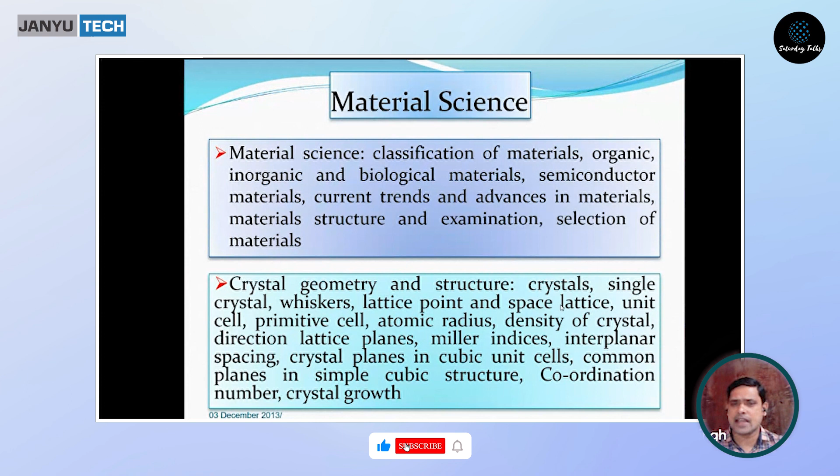In this, it is very important to know the crystal geometry and structure - crystals, single crystals, whiskers, lattice points. These are very basic physics concepts. I will not go into detail of that, but try to focus on understanding the material in a general way rather than from the physics point of view.

Material science people also know it as materials engineering. It is an interdisciplinary field applying the properties of matter to various areas of science and engineering. For example, if somebody says I want to work in making rockets, rocket making involves multiple aspects - like what type of material will be used for painting the rocket surface, what kind of material the rocket body will be made of, which should be light, and how it is made. This is basically the aerodynamics and engineering part. So material science actually covers both science and engineering.

This relatively new scientific field investigates the relationship between the structure of materials at atomic or molecular scales, and how this is responsible for macroscopic properties - like which paint we use on the surface, which will define how much weight it adds and whether it can pass through Earth's atmosphere without burning. All these are called macro. Macro means big - we'll talk about how big later. We can understand macro as something we can see with our naked eyes, like my fingers or my hair, but cannot see things of micro size, like bacteria. Micro sizes are about 100 times smaller than the diameter of hair - 100 micron is the diameter of our hair.

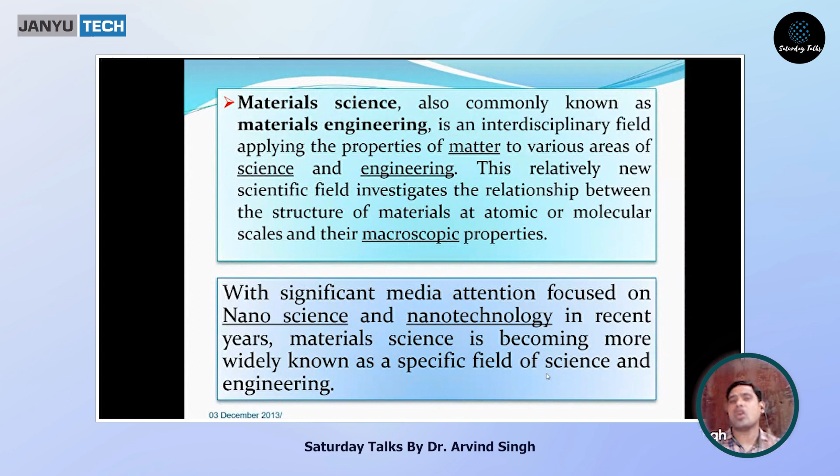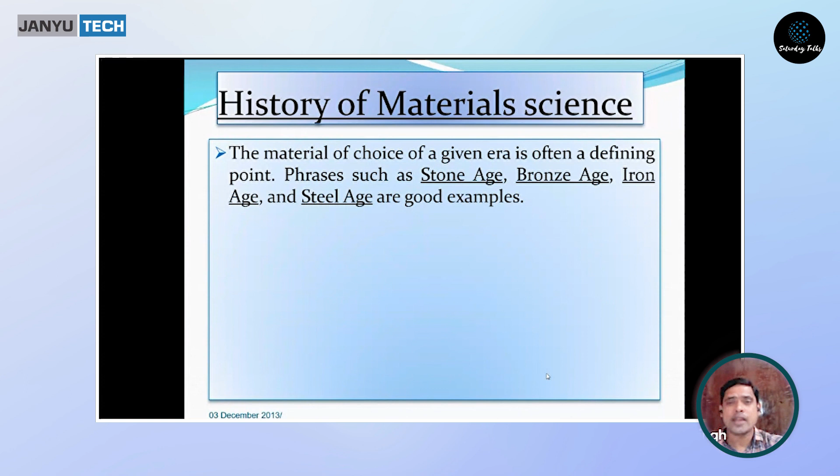So let us see what was the history of material science. I'm not going to show diagrams of olden or historic period materials, just a few points. The material of choice of a given era is often a defining point—you can understand how important materials are. Even the age of human civilization is defined by the type of materials they were using. So it was the Stone Age, Bronze Age, Iron Age, Steel Age, and these are some good examples to know how important material science is.

A major breakthrough in the understanding of materials occurred in the late 19th century when the American scientist Josiah Willard Gibbs, known for thermodynamic study in physics and chemistry, demonstrated that thermodynamic properties related to atomic structure in various phases are related to the physical properties of the material. This was a remarkable discovery, a breakthrough in understanding how this happens.

To help you understand, suppose we have chapatis made at home. If you want to check any material, we use X-ray, other techniques, scanning microscopes and so on. But if your mother is making a chapati at home, we don't take an instrument and peep inside to see whether it is made or not. How the surface looks now decides how much heat has passed into the inside of the chapati. So this is basically thermodynamic properties related—how the material is forming—and that is actually related to the atomic structure of the material.

You will have good, very flexible chapatis with maida. You will not have good flexible chapatis, or rotis, with jowar or bajra grains—they are different in terms of their atomic structure, in terms of their makeup. The same way materials also vary. You can see the powders of jowar, bajra, or wheat or corn—they look almost similar, not very different. But when the chapatis are made, they look so different.

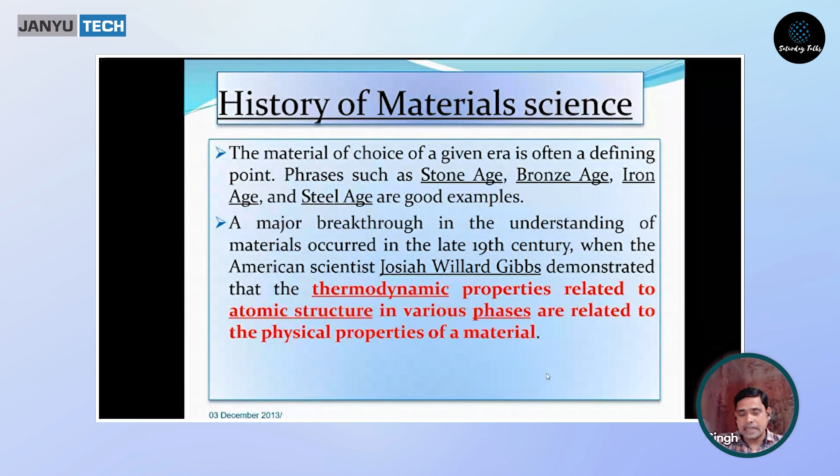So this is actually what thermodynamic properties means—how the materials are going to behave, their thermodynamics, how the molecules and atoms move and behave with each other. That is related to the structure property, which in turn is related to their various phases, and then to their final physical properties as well as their other chemical properties.

So the basis of material science involve relating the desired properties and relative performance of the material in a certain application to the structure of the atoms and phases in that material through characterization. So whatever material we are taking, we characterize it. The major determinants of the structure of a material, and thus of its properties, are its constituent chemical elements and the way in which it has been processed into its final form.

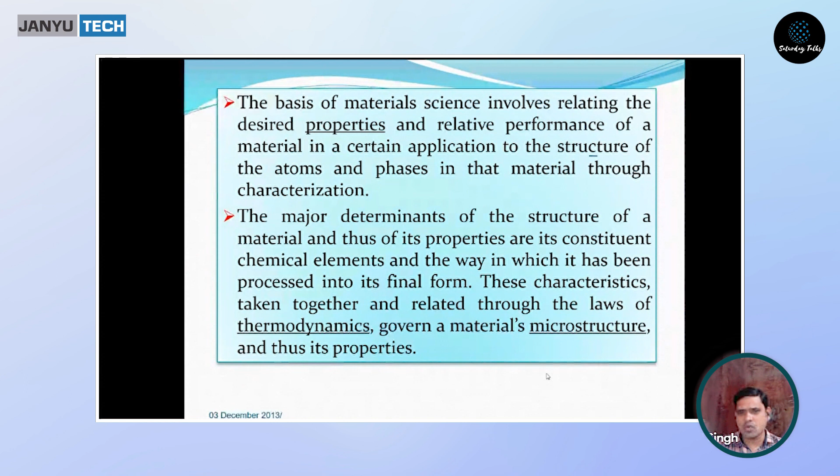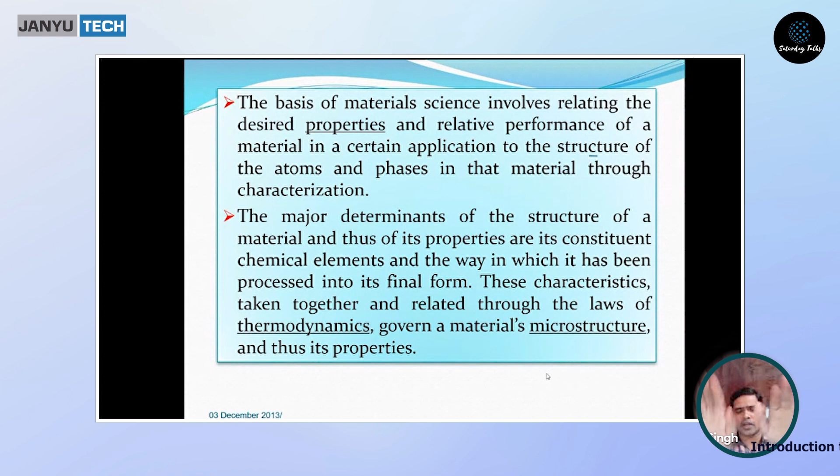So if you recall, I've already talked about this—I took the example of making chapatis with bajra. For bajra, you don't need to knead the dough so much; you can just mix it with a little water and put it on the frying pan or something like that. So there are different processing techniques.

Let us see again the historical perspective from a different angle. Materials are probably more deep-seated in our culture than most of us realize. What are materials? Materials are the substance of which something is composed or made. Every segment of our everyday life is influenced, to one degree or another, by materials.

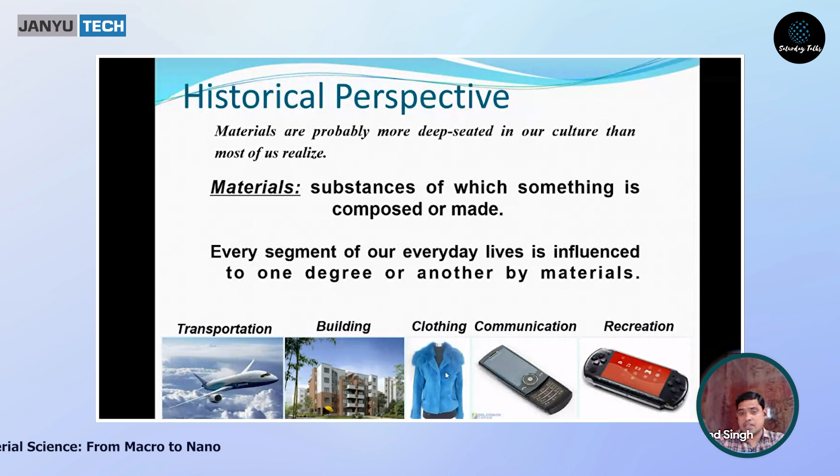Just take the example of mobiles—earlier they were small and heavy, now they are becoming thinner and lightweight. Transportation is very important too; we have aeroplanes, but also other modes of travel. Buildings can now be tall and built in a month or two. Clothing—when it's cold we use warm stuff; earlier it was thick blankets or jackets, but now there are thin inner layers, as advertisements call them nowadays. Communication and recreation—all these are materials from a material science perspective.

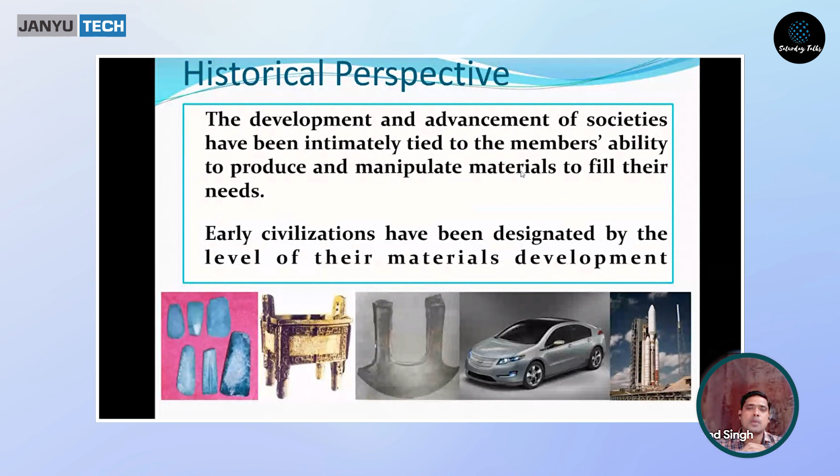Now, as we have already discussed, the development and advancement of societies has been intimately tied to the members' ability to produce and manipulate materials to fill their needs. Now, when I say materials, we have already discussed this.

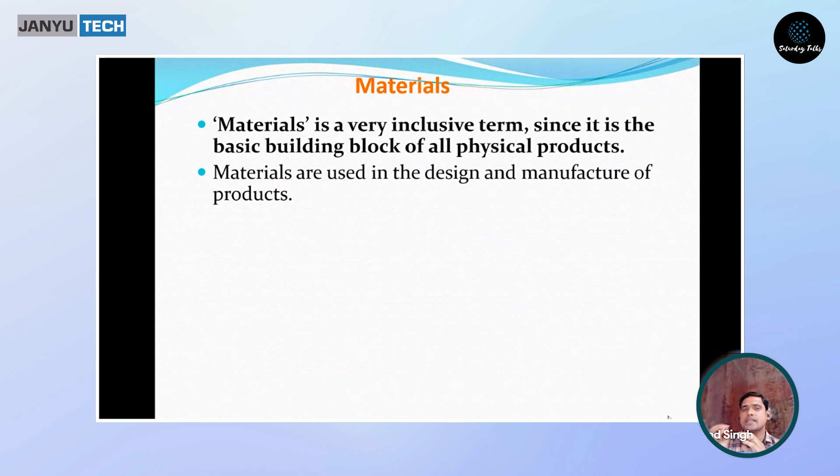Material is a very inclusive term since it is the basic building block of all physical products. Materials are used in design and manufacture of products.

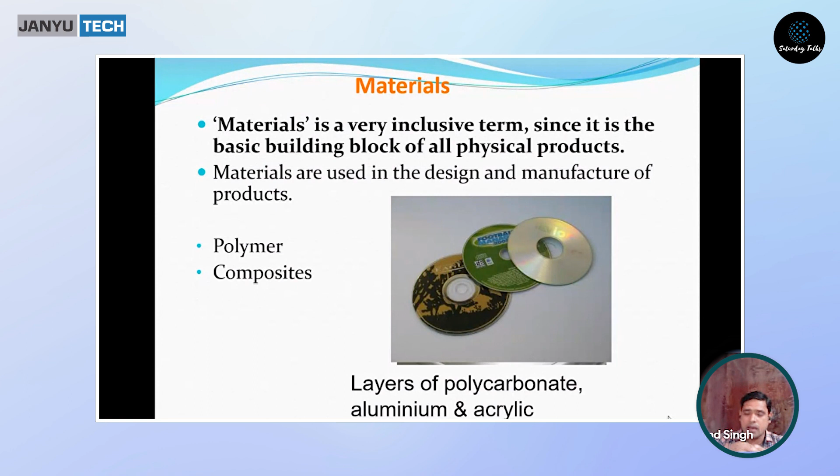You have polymers, like polycarbonate and similar materials, which are tough. Then we have composites - these are basically polymers with a metallic layer on them, layers of polycarbonate, aluminum, and acrylic. Composite means mixture of 2 or 3 types of materials - you may have a polymer with some metal infused in it, and that is called a composite.

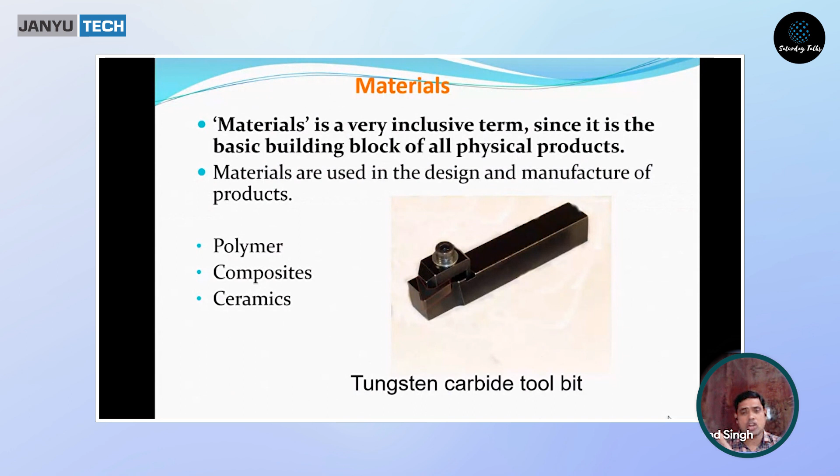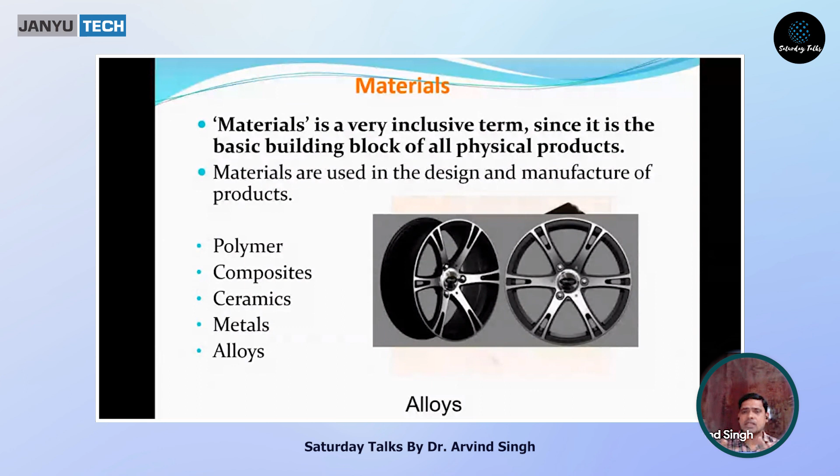Then you have ceramics - they are very brittle, like ceramic porcelain, dishes or jars, they're all ceramics. Then we have metals, and we have alloys, a mixture of many metals or different materials. So we can categorize materials into a few types: polymers, composites, ceramics, metals, and alloys.

Now, what is material science? Basically, we need to see how materials are cast, how to make them. These chairs we are sitting on, or plastic materials, or molds, they are heated and put into a certain cast - that is called casting.

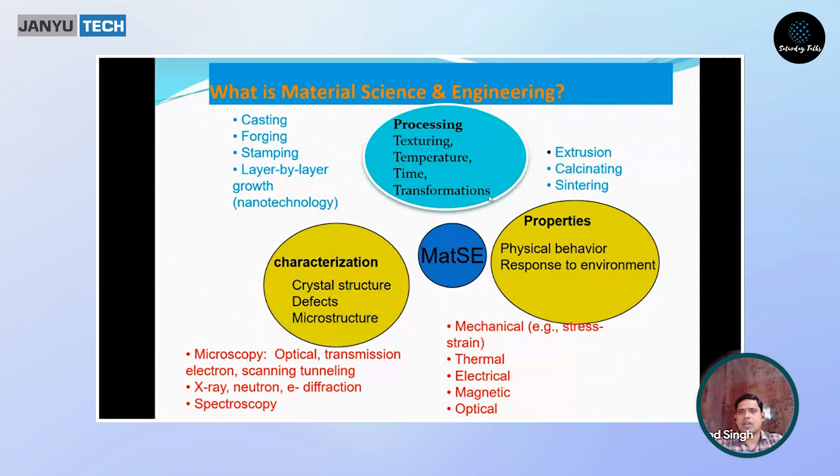Metals are formed like forging, stamping, layer by layer, and other things. Once this material is formed, it needs to be processed, like texturing, temperature, time, transformation, heating it for a certain time, and all that. So this is the overall view of material science.

I'll go to the next slide, which will be better. If you want to understand from the engineering point of view, understanding material science and material engineering is important if you are thinking of a startup nowadays. You should know what material to take, how to check the material, how to characterize it, meaning how to analyze whether you're getting the desired property or not. In doing all this, we come across 4 pillars or points.

That is called structure, processing, properties, and then performance. You need to first decide what performance, what final product you are looking for. Then you need to see what properties you want your material to have. Then you can see what structure the material will have and how you will process it. These are very basic, important things.

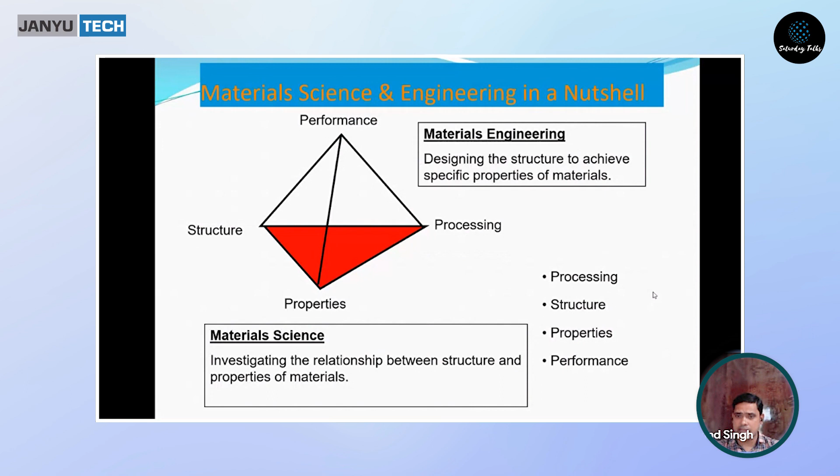We can say there is a relationship between structure and properties of the material. Designing the structure to achieve specific properties of the material is very important. So these are the 4 important things: processing, structure, properties, and performance.

Many applied scientists or engineers, whether mechanical, civil, or chemical, are exposed to design problems involving materials - like gears, integrated circuits, buildings, oil refineries, and other computer applications. That is called material science engineering, or MSE.

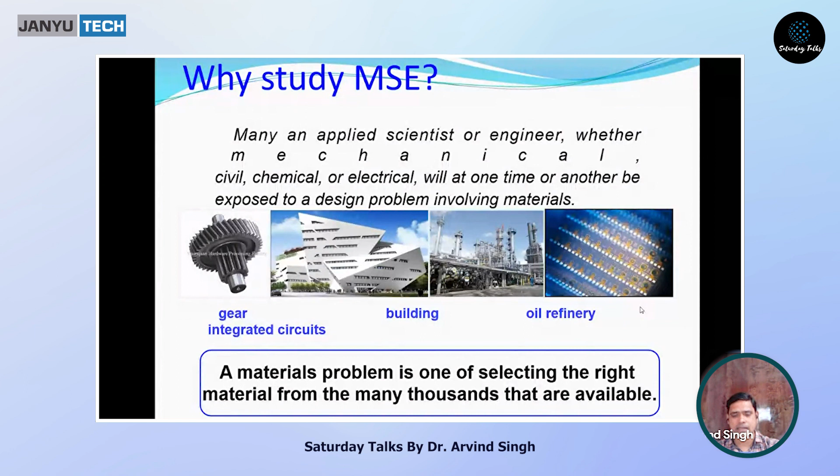A materials problem is one of selecting the right material from many thousands available. So criteria for selecting the material - if you want to do a startup, if you're looking to make something new, you have to first see, like in service conditions, determine the properties required for the material.

Any deterioration of material properties may occur during service operation - for example, significant reduction in mechanical strength. So you have to look for all that.

Then economics, the most important one. You want to sell it. You have a startup, you want to do social work, create a good environment, help people, reduce carbon footprints, but again, money is involved. So you have to also look for the economics, funding type.

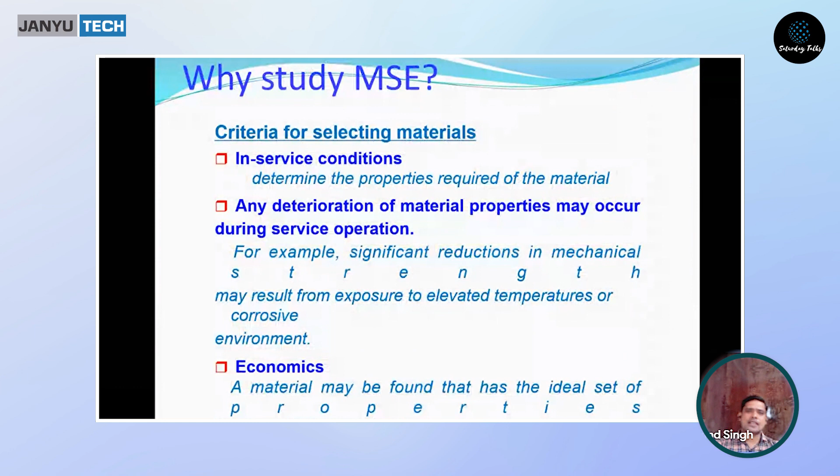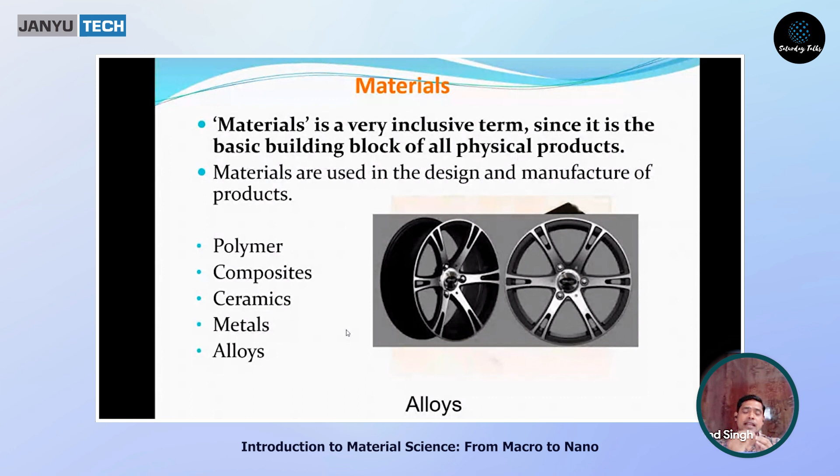Now, as I've discussed all these materials, going back to this slide - nowadays all these materials are doped or infused with special materials, which are called nanomaterials. So we are moving to the second part of the talk: what is nanomaterials and nanotechnology, which is a very fascinating and upcoming field.

Just to make you understand what a nanometer is, or how small a nanometer can be - if I take a meter, that means 100 centimeters. Generally we have a small scale - my palm length, from finger to this end, is 15 centimeter, around 15 to 20 centimeters.

So you have 100 centimeters, that is 1 meter, right? If you see this small part of our hand, that will be 10 centimeters. If I probe further with a microscope, 1 centimeter will be the smallest part we can see. And if I see the pores of my skin, that will be around 1 millimeter. And then, which we cannot see with naked eyes, but if we use a microscope, we can see this type of structure on our hand.

So this much distance is 100 microns, right? 100 microns, or here again 100 microns. And if I further probe, 10 microns, you can see white blood cells, right? So this is just for understanding.

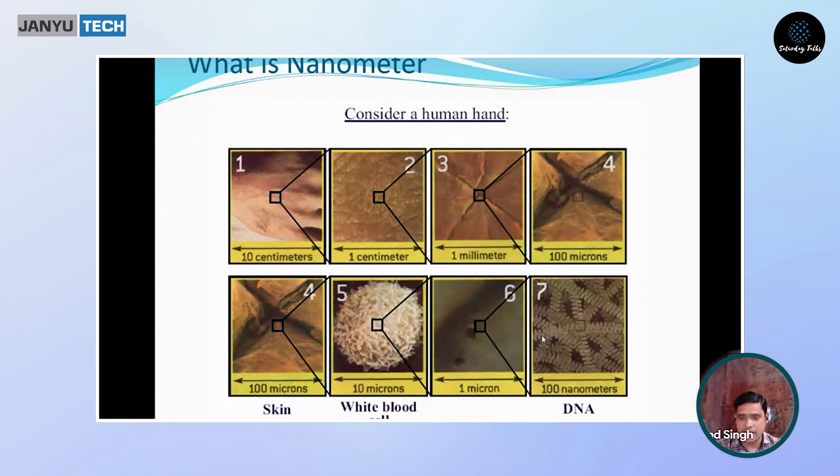Now let us compare with different organic or biological materials. Like white blood cells or RBCs, red blood cells, which are circular and donut-type structures. They are 5 to 10 microns, which we cannot see. And then we have DNA, which is around 100 nanometers. In 100 nanometers you can have so many DNAs. DNA is just 1 or 2 nanometers in size, very small. So this is just giving an idea.

There is one more slide to give you an idea. An ant is around 5 millimeters, that is 0.5 centimeters. Human hair, as I said, is 10 to 50 microns, that is 10 raised to minus... well, it's generally not that, it's generally 50 to 100 microns, that is micrometers, the diameter of the hair, right? So if you take 0.1 micron...

That means you have to draw 100 lines onto this, and one single line will be 1 micron. So micron means 10 raised to minus 6, that is 0.000001. So small is 1 micron. And if you take a hair and put 100 lines across it lengthwise, that will be 1 micron.

Imagine these are RBCs. Then DNA is around 2 to 2.5 nanometers. If you see the head of a pin, it is 1 to 2 millimeters. And cellulose fibers or very small things are around 20 to 100 nanometers. Those in science know what a carbon nanotube is, rolled sheets of carbon or graphene, carbon nanotubes, they are this small.

If you take 5 atoms of silicon, it will be 1 nanometer. You cannot see atoms even with the most efficient instrument. There is some way to see them, but it's very difficult. So this gives you an idea of what is meant by nanometer, very, very small, right? We cannot see it even with high-end instruments, but we use TEM, transmission electron microscopes, and we can see them.

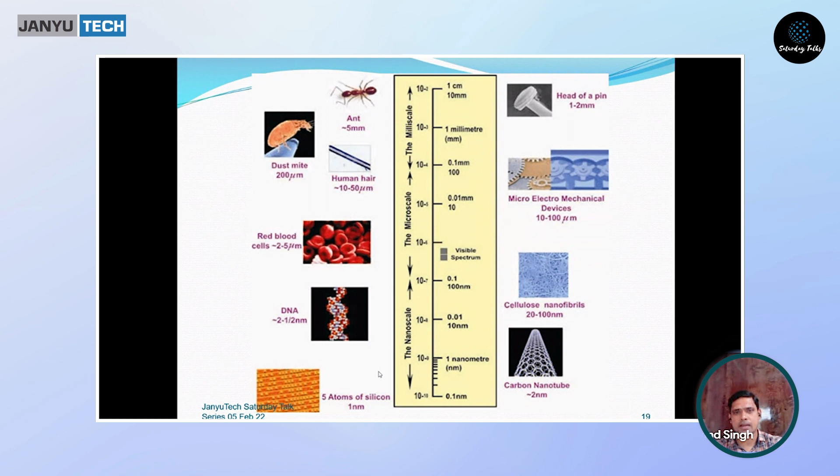Now let us come to the world of nanoscience and nanotechnology, and why I say it is very fascinating. Now we take medicine by eating it or through injections. But we can make small injectable nanobots or nanorobots, which will have certain features like this. Their size is less than the diameter of hair, 10 or 100 times smaller. They can specifically go to a particular virus or diseased cell, and catch it and crush it, or bring it to dead form by attaching some chemical onto it. So if you see the view, it will be like this.

This actually came into a General Electric TV commercial in 2005, also inspired by Fantastic Voyage from 1966. So humans have been imagining all these things for the last 20 to 40 years, and now we can see them coming into reality.

Before knowing what nanotechnology is, there is a famous lecturer, I will say, not just a scientist but a scientist and lecturer and everything. We call him more like a physics lecturer because he was a very good professor who used to talk, and people used to write books based on him. His lectures were converted into volumes of books: Dr. Richard Feynman's volume 1, volume 2, and volume 3.

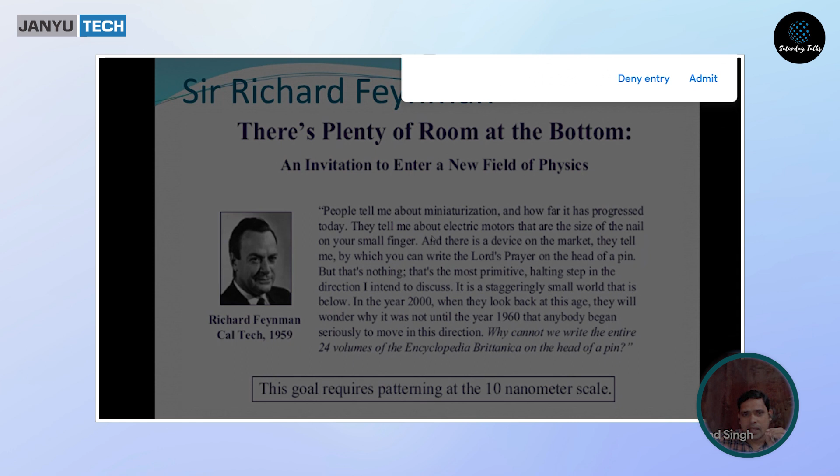In 1959, at Caltech University, he told people that you can write the Lord's Prayer or Bible on something very small. He said, people tell me about miniaturization and how far it has progressed today. Tell me about electric motors, and there is a device on the market, they tell me, by which the Lord's Prayer can fit on the head of a pin. But that's nothing, that's most primitive, a halting step in the direction I intend to discuss. It is a staggeringly small world that is below.

In 1959, he said that in the year 2000, when they look back at this age, they will wonder why it was not until 1960 that anybody began seriously to move in this direction. He said, why can't we write the entire 24 volumes of Encyclopedia Britannica on the head of a pin? And now it is possible.

People have done that. At that time, he had also set up prizes, like if you write very small, I'll give you a prize. So what they did, we'll see that later. He said this goal requires patterning on a 10 nanometer scale to write these 24 volumes. At that time it was difficult, but nowadays it's very easy. Just imagine the powerful imagination of a human being.

Sir Richard Feynman, in 1959, had said that all this is possible. What you're talking about, writing the Lord's Prayer on a pin, you can even write 24 volumes.

Nanoscience and nanotechnology - these are like two figures, both in Mumbai, like Ajanta and Ellora, right? Elephanta Caves - if you go from Church Gate to the island, there is Elephanta Caves. And there is the Gateway of India. These two are basically made in different approaches. How this cave was made - a big stone or big hill was there, and they go on removing things from that. The second one was made by brick. So this was bottom up approach, and this is called top down.

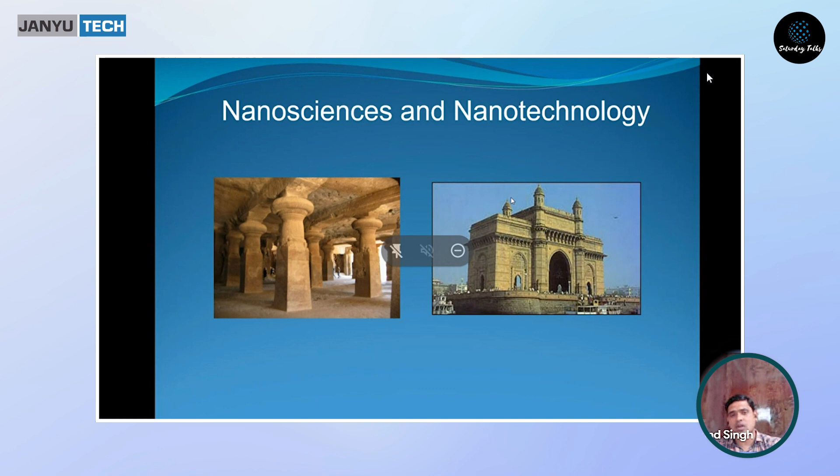So that is top down approach - we take bigger materials and we make them small. We can also have atoms coming close together and we can make nanoparticles that way. So there are two ways: one is called top-down approach to make nanoparticles and one is bottom-up.

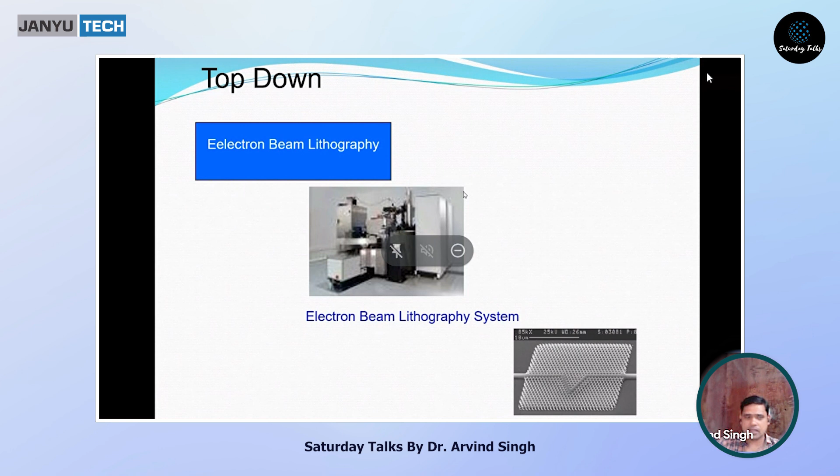There are instruments like electron beam lithography - you can take an electron beam and pattern things. So these are photonic crystals made using an electron beam lithographic system. You can see how much patterning is there, and the size is very small - 10 microns from here to here. See how beautiful the patterning is. That is called top-down approach.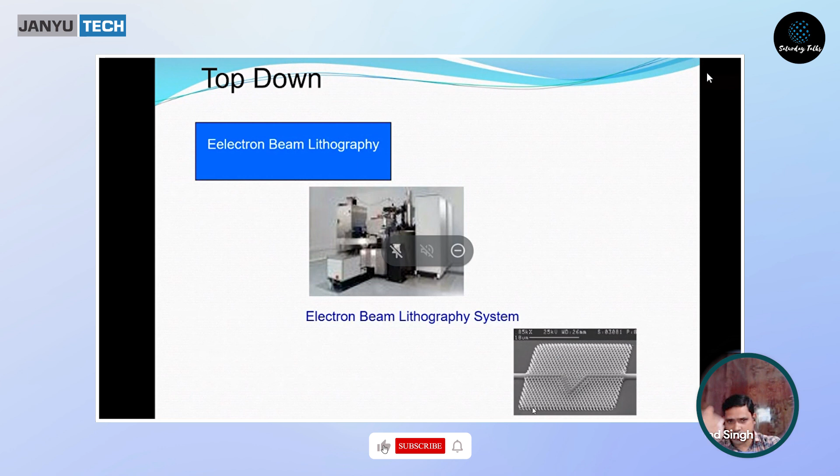Now when you take nanomaterials or nano stuff, they have the same composition but they appear different in color. You will be surprised to know, if you haven't known what nanomaterial is, that these are different forms of gold material - all gold at different sizes, like 10, 20, 40, 100, 150 nanometers.

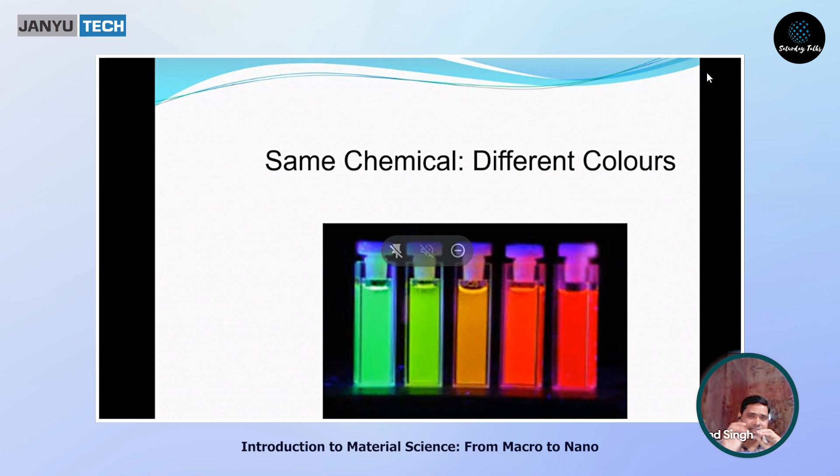So when the size of the material changes, what happens? We see objects because light falls on them and comes to our eyes. These materials are so small that their length is comparable to the wavelength of the radiation, and then the absorption and emission is different - that's why we see different colors. White light is also made up of 7 different colors. So these particles, when their sizes differ, match certain absorbance peaks or wavelengths of particular light, and hence they absorb that color and appear that way, depending on the wavelength of light and their size.

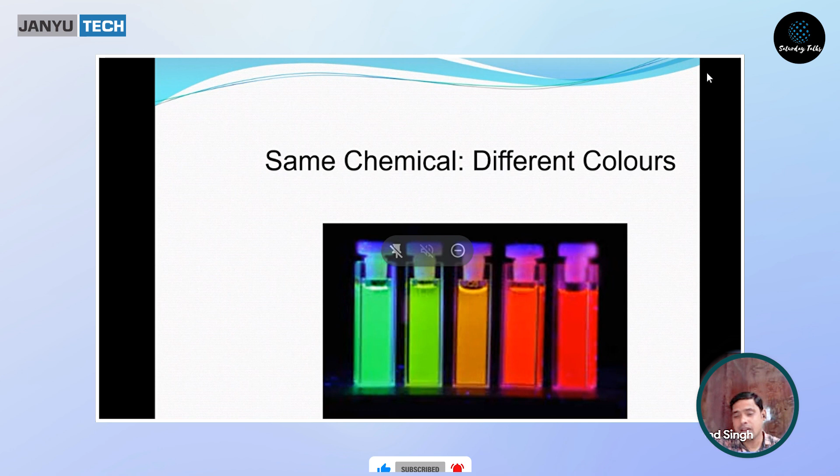So imagine how the human brain was - he had made minute particles by dividing gold. He had taken bigger gold and by chemically modifying it in 1857, he made gold nanoparticles.

But my dear friends, students, seniors, before this, long back - 1,000 or 2,000 years before - we had bhasmas in Indian tradition, Indian culture, Ayurveda or Unani medicine, and all that - they all used this nanoform.

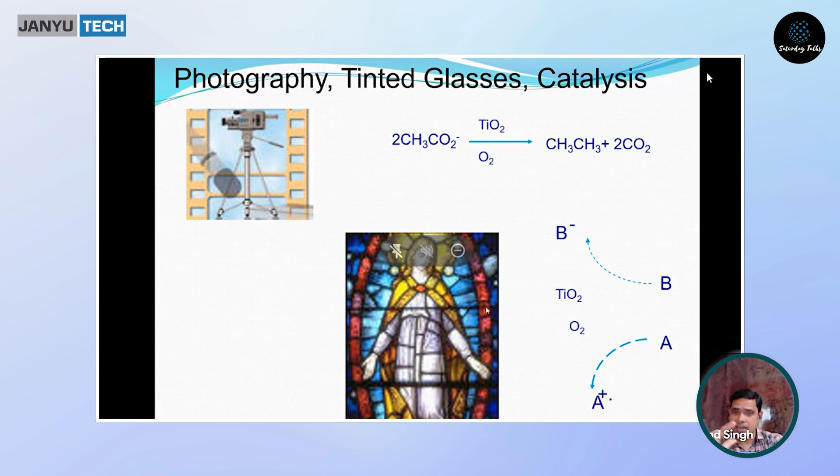Now why should we deal with nanotechnology? What is so important about nanotechnology? Why should we come into this now suddenly? Although we have come across a lot of theories of nanotechnology, and when we're talking about startups and all, what is so fascinating, what is so important?

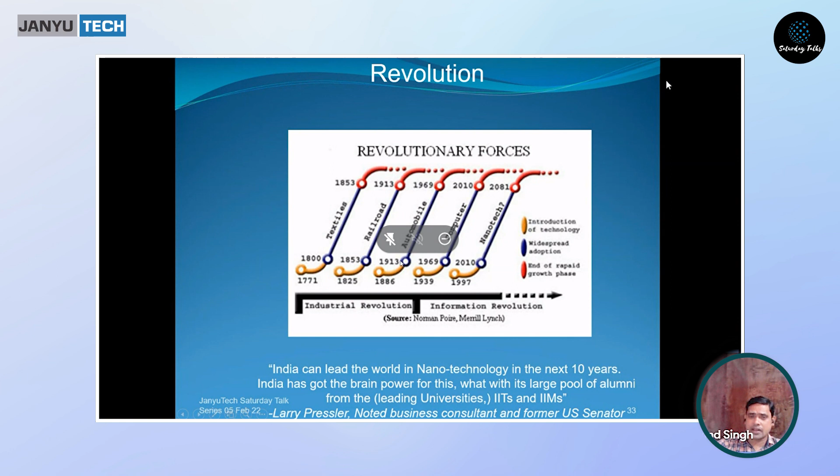Around 1850-1800 it was the textile era. Then India was invaded by foreign rulers and they took all the cotton, jute, everything from here. There was one time called the White Revolution. Later, around 1913, there was transportation and infrastructure development happening everywhere in the world. Then around 1930 to 1970, it was the automobile field. New cars and all this stuff were made.

Then we came across the period from 1970 to 2010, which was computers. Around the same period, 2005 to 2020, it is the IT field also. So I can club computers and IT together, that is information technology.

But remember, it's not just my words, it is the words of all the scientists working right now and many companies, that nanotechnology is going to be the big thing, or it is already a big thing. You see all the labs everywhere around the world, 70 to 90% of people are working with nanomaterials in some or the other way.

So this will go on for around 40 to 50 years - introduction of the technology, widespread adoption, and then the end of rapid growth. Maybe we don't know what we are going to do later on, but this will take another 50 years for us to grow.

India can lead the world in nanotechnology in the next 10 years. India has got the brain power for this, with its large pool of alumni from leading universities, IITs and IIMs. This is from Larry Pressler, noted business consultant, former US senator.

So you can come across a concept called polymer nanocomposites. What are polymer nanocomposites? Basically you take a polymer - all your clothes, polyester clothes, are made from polymer only. There are small granules, which are made into fibers, and that fiber is spun to make clothes. Or your chairs, vehicle covers, or plastic bags - everywhere there is plastic. But these plastics are normal.

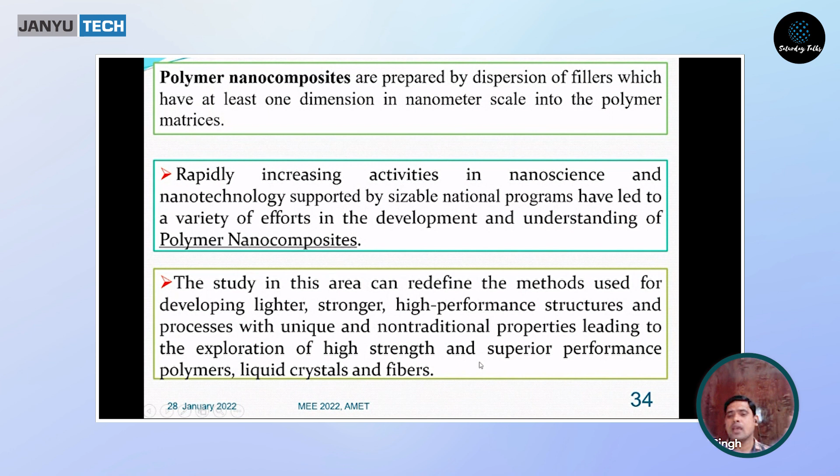There is rapidly increasing activity in nanoscience and nanotechnology, supported by sizable national programs, which has led to a variety of efforts in the development and understanding of polymer nanocomposites. The study in this area can redefine the methods used for developing lighter, stronger, high-performance structures and processes with unique and non-traditional properties, leading to exploration of high-strength and superior performance polymers, liquid crystals, and fibers.

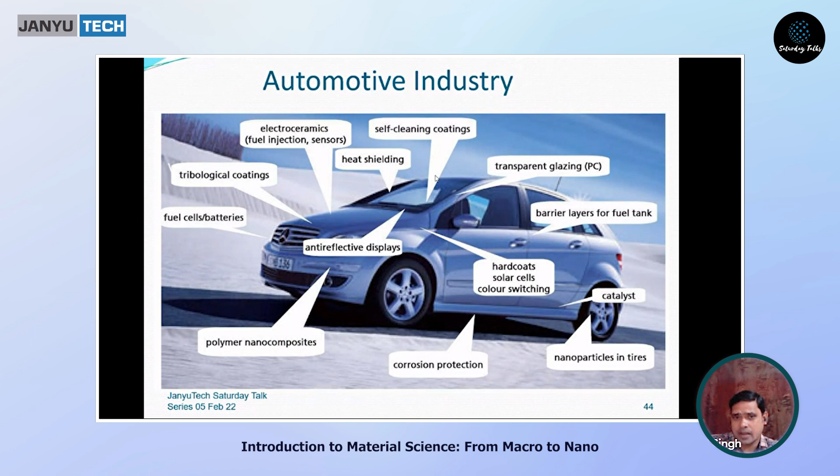Just an example I was talking about - self-cleaning coatings. The leaves are so clean. You see a lotus leaf - now we don't see much lotus leaves, but you see the aloo vadi leaf that is used to make rolls, or many other leaves. They are self-cleaning. Nature has made them with pores, nanostructured pores. So we can have the same type of structuring.

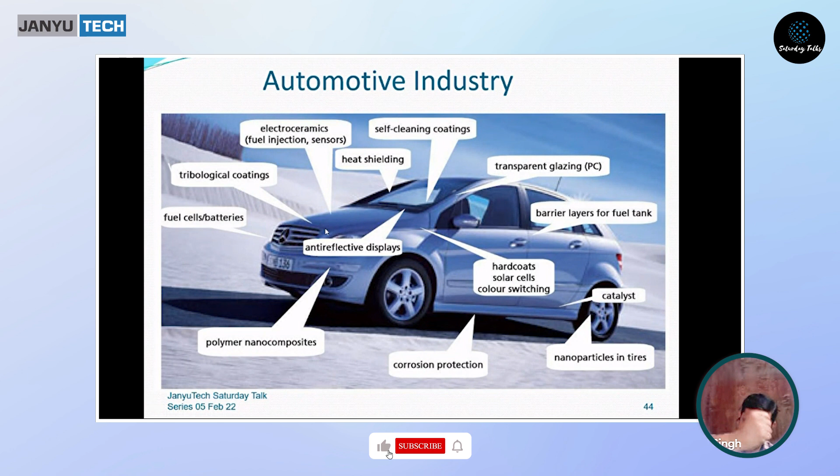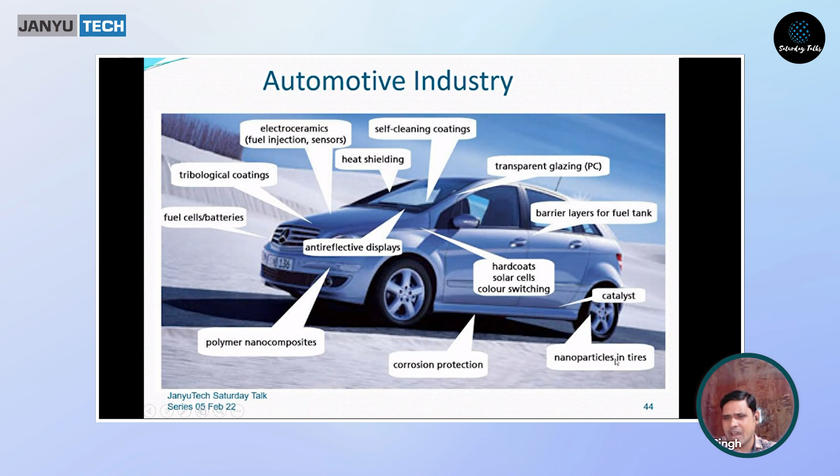Fuel cell batteries, polymer nanocomposites, anti-reflective displays, corrosion protection, hardcoats, solar cells, color switching, catalysts and nanoparticles in tires and all that. If you use these, it has been running well.